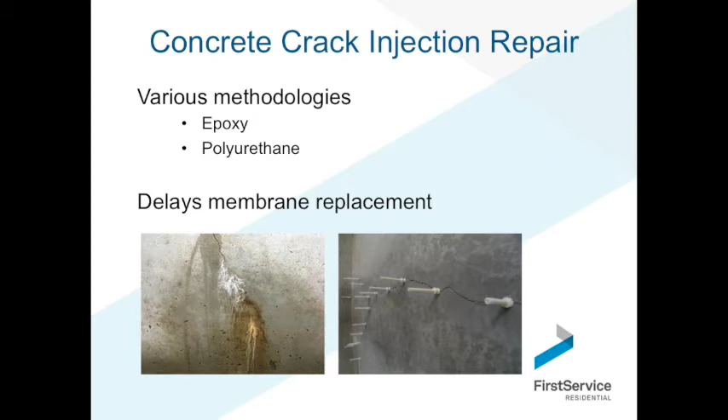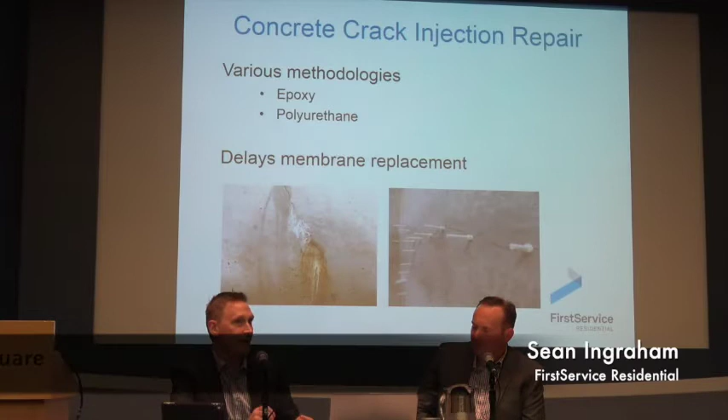Okay, so concrete crack injection repair. I'm sure everyone who's got an underground parkade has gone by and seen these big unsightly cracks. Sometimes they still leave the stubs from the injection, the polymer injection. So there's two basic types of crack injection. The epoxy is used largely for hairline cracks that are structural in nature, and it's kind of the Ferrari of crack injection because it has to be done at relatively higher pressure. It has to be done on a dry crack, all these other wonderful things.

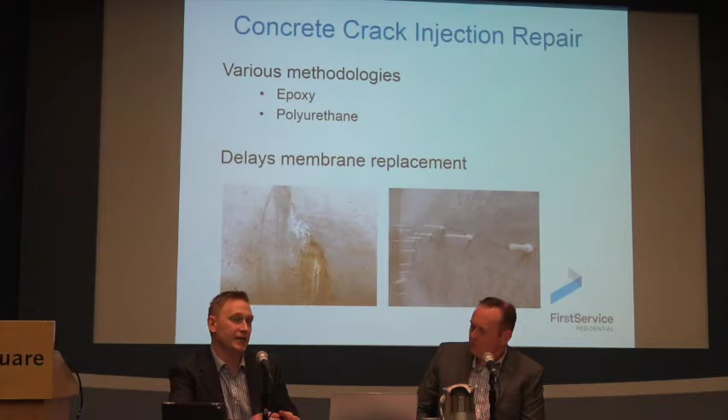What most people will get is a crack that's leaking on the exterior wall of a building. It's seeping in that nasty water and it leaves all the deposits, the efflorescent deposits on the side of the wall. And that's what polyurethane injection is for. So you can do really big, fat, wide cracks with polyurethane, and cracks that are actively leaking you can seal with polyurethane. The point of doing all of this is to try to keep your concrete, your parkade dry, your basements dry, so that you can delay costly membrane replacement.

I did a reserve fund study for a property that had two wings of the building that came at an angle, and the center had a pond on it, and the cost for digging up the pond and replacing the membrane over the parkade was something like $6 million. So anything you can do to push that back is life-saving, right?

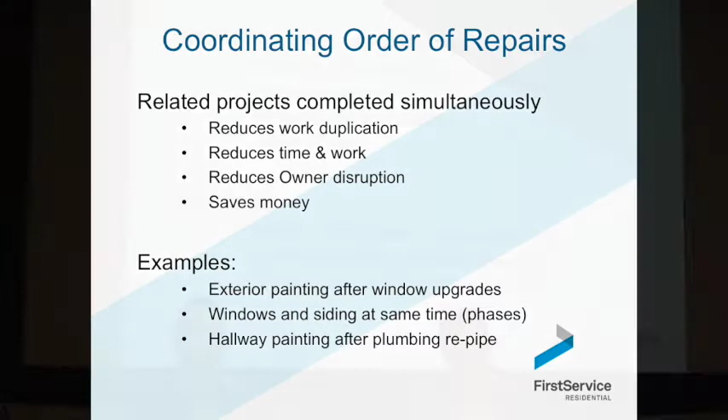Talk a little bit about coordinating the order of repairs. Sean talked about this a little bit earlier with why would you pressure wash windows you're going to rip out. We see a lot of times where a depreciation report has been created with the intervals. The windows are at 25 years, the siding's at 30 years, so they don't try to even line these things up. So they're talking about coming in, staging, scaffolding, ripping out the windows, putting new windows in, coming back 3 years, 4 years later, ripping all the siding off, scaffolding again.

Why not do these projects at the same time, minimize the pain in the butt to everyone's life, and do them in phases? So scaffold phase A and do all of it at once, and then 3 years later do phase B. So what you can do is minimize the disruption to the owners in any one block of the building, and you get a synergy with spending your money. And this is a little bit what we're talking about, efficiency in spending your money.

And then, exterior painting after you do your window upgrades, and we see a lot of times where they'll be doing a lobby upgrade, but they just painted 2 years before. So there's a lot of synergies you got to look for and a lot of cost savings as far as lining things up in the strata. And that's why if you look at that big, huge 30-year projection you get, it can be daunting, but you should have a look at it and read through and see what they're saying, because sometimes the things won't line up and they won't make any sense to you, and you can make changes. It's not written in stone.

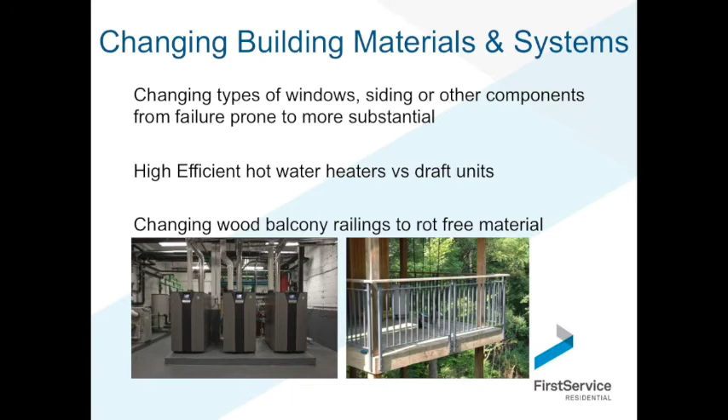To talk a little bit about changing building materials and systems, if you've got something that's failing on you, it doesn't make a lot of sense to just put it back in. And in the depreciation report, the easiest thing to do is say replace like with like and move on. A little bit of a caution here, you can't really do upgrades out of your CRF, out of your depreciation report. So if you've got lino somewhere, you can't put in Italian marble. But that doesn't mean you can't put in something similar that's working a lot better than that particular product.

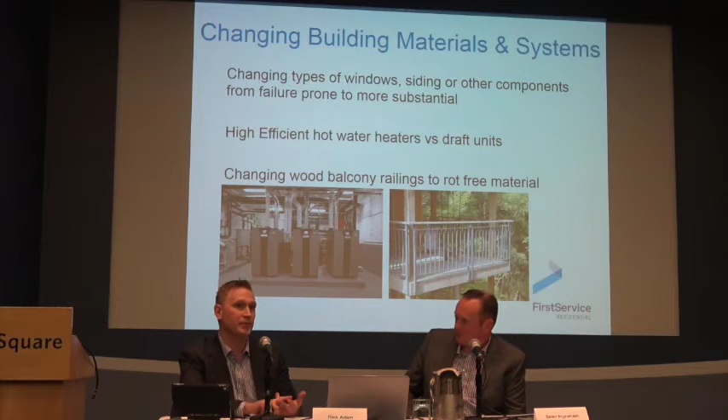And a great example of this would be high efficiency hot water heaters versus draft units. A draft boiler is the boiler that everyone's always seen. It's got the big, huge vent that goes out the top, out the roof. When they are brand spanking new right out of the box, they are 60% efficient at best. That efficiency goes down every year until you pull it out. They're full of scale, they don't do a very good job, and the reason why they're selected is because they are the cheapest option, period. The developer is trying to get heat in the building, draft boiler, in it goes, job's done.

If you switch to a high efficiency hot water heater, the lowest efficiency I've seen on a high efficiency heater is 94%, and they go up from there for pricier models.

You save roughly $100,000 per 1 MBTU of heating capacity over the life of the boiler. So if you have 5 MBTUs of boiler heat in your building and you switch to high efficiency, over the life of the boiler you stand to save $500,000. So that's money that could be spent elsewhere. That comes right off of your operating budget and goes right into your CRF.

And then lastly, wood balcony railings. I'm not entirely sure why people are in love with wood railings in BC where everything just rots like gangbusters, but if you're replacing wood railings every 10 years for $50 a linear foot and you change them to aluminum railings that cost you $100 a linear foot, but don't need to ever be changed. I mean, when does an aluminum railing ever need to be changed?

They last forever. You can save significant money, and when you put it in the model and take that out, it shows up 3 times in the model fixing the railings. You put it in once for double the price, but it never reappears again. There's some savings there, right?

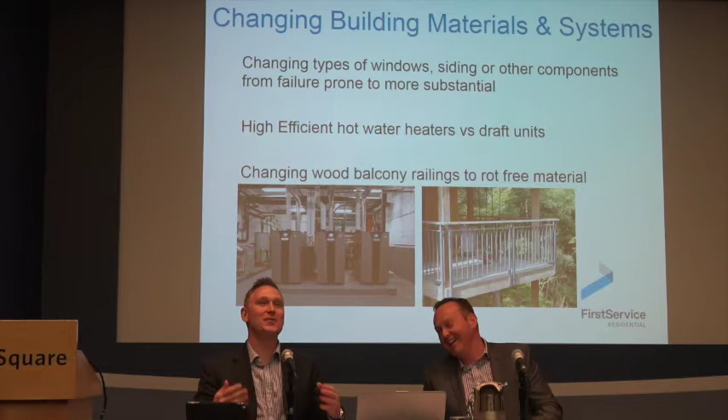Ultimately, the point of the last section of the report is that there's ways that you can spend a small amount of money intelligently to defer big ticket items. One of my planners told me a story about a property where over the course of 3 years they were trying to find the leaks around planter boxes on the roof, and they spent 70 grand trying to fix the leaks, and then 2 years after they gave that up, they spent 110 grand to just fix the roof.

So they spent 70% of the replacement cost trying to chase these leaks down, when somebody should have told them at one point, listen, you are absolutely chasing your tail here, stop and let's just fix the roof. Because they would have saved 70K. That's the point I'm trying to drive home here.

So really what we've done is we've gone through, I'm going to summarize where we've gone. The first thing was, what is a depreciation report? Then we went on funding models, which is a really important part of depreciation reports that we keep on forgetting. And we've harped on the 5-10 year plan instead. Then we talked about the implementation plan and how you go forward.

One thing I didn't mention is a great idea is just a short little document where council writes up, this is our plan. Our plan is we're going to go here, because the council may not be there next year. We had one building where all of the council moved or sold in 1 year. So we've got brand new council, and not a lot of the history was kept from them.

So a little document, and you can put it in your council meeting agenda once a year. Oh, this is our plan, this is where we're going, let's review it. It's not a hard thing to do. The hardest part is starting the momentum of getting the whole process going.